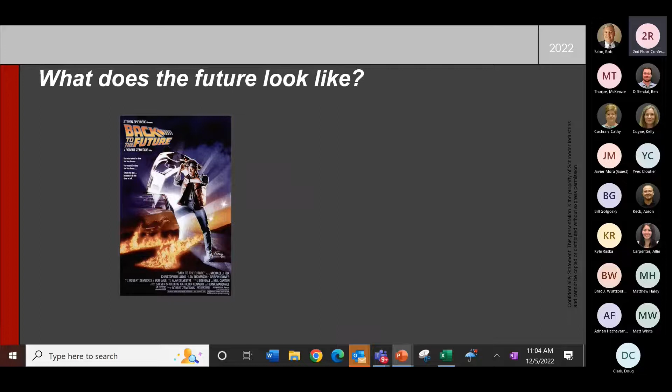Thank you, Rob. Yeah, to talk about the future, I always like to go back to the movie Back to the Future. I think all of us can really enjoy and relate. But that gave us a bit of a cinematic glimpse of what we thought the future was going to look like in the 80s and 90s. Now, at the time, that was a DeLorean strapped with a flux capacitor and ready to leap at a speed into the future, into the past, depending upon which version of Back to the Future you watched.

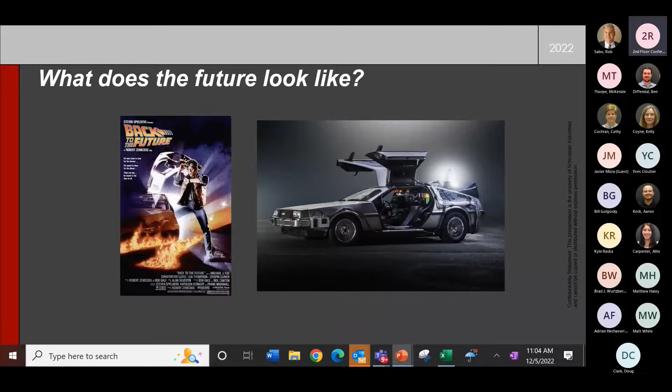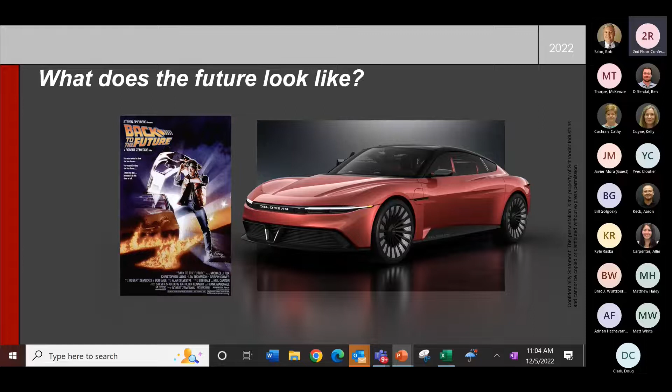But we even see that echoed today. In a similar characteristic, we see where DeLorean is looking to the future of their product line and looking at EV technologies and that movement within not only the on-highway industry, but what affects us today is that movement towards e-mobility and electrification. So there's a lot of questions left on our mind. And that one question is, diesel, where we're going, we don't need diesel.

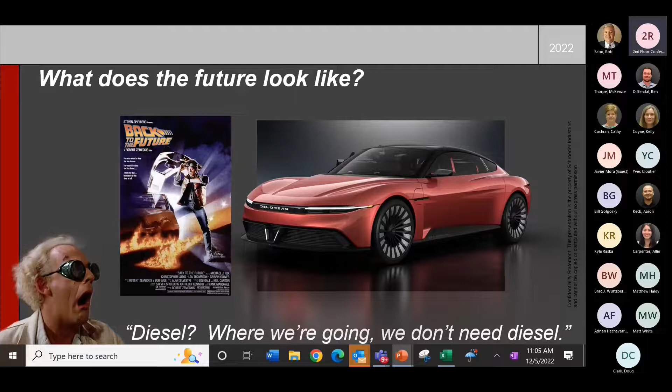That's a question that we hear quite often, one that we hear from corporations and consumers alike, but we're here to dispel that concern. I think it's easy to throw the baby away with the bathwater when we consider electrification and e-mobility. Now, 2 articles that we've had to reference highlight that diesel power is here to stay for at least a long run within all of our careers here on the call.

So electric vehicles within the military have been a critical part of what we look to as far as the indication of where fuel consumption is going. Much of the military vehicles are expected through 2035 at the minimum to continue using what we know as a common liquid fuel like diesel or jet fuel. Now, energy density of batteries is said to be a challenge, 2 orders of magnitude less than the jet fuel JP8 they're currently using. And because of the nature of electric power availability in the battlefield, recharging all electric vehicles just doesn't make a lot of sense given the current technology and where we stand.

Now, if we look to the consumer market, we look to a company like Cummins, one of the major engine manufacturers, that was published in OEM Off-Highway at the end of last year, that highlighted the fact that diesel still has a long runway. I love that phrase because it really highlights that this is an ever-changing and evolving ramp towards e-mobility. And off-highway equipment, married with that remote, desolate operation of many of the machines we're using, make diesel a great solution and very difficult to replace with the battery and energy storage technologies we have today and even on the horizon in the near future.

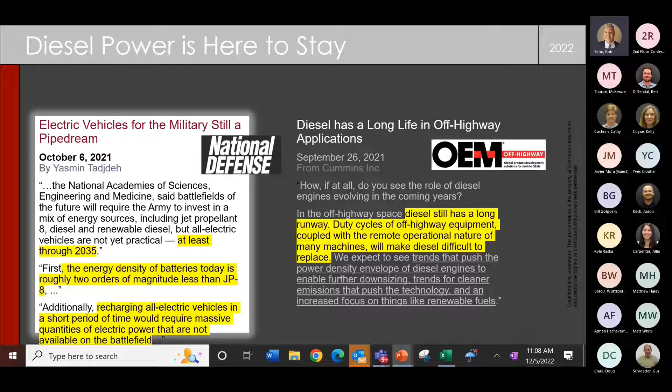The current global grids that are out there are not capable of handling the amount of energy that's in today's grid and the needs for that. We hear about the blackouts here in North America, the rationing over in Europe. You get into South America where they don't even have that type of grid. The CEO of Toyota said the same thing. They're going to pursue the role, but by no means whatsoever is that going to be a primary or dominant area for where we serve.

And where we serve, we are really focused on the diesel engine market. I'm going to segue into that for a couple different reasons, but that is the real forte of not only where we've been, but where it's going. Many of those applications are utilized in agriculture, off-road, the marine. We're not in the on-highway side of the equation. So as Aaron had pointed out with the military side, how do you charge those vehicles in remote locations? How do you do it multiple times? It's one thing to have a vehicle that's capable of that, but the operation, that type of placement, is the part that we're dealing with.

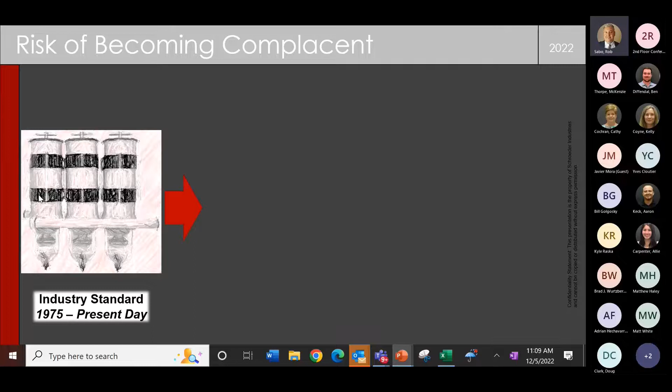So when we talk about the diesel engines in the market today, I actually got a little ahead of myself. Many of you have seen this in the field. It is a rendition of the Parker Racor turbine series. It was first introduced in 1975, and it is still being used today in the same present form. Some modifications, but basically you'll see that configuration either in a single filter, a double filter, and or a triple. That really hasn't changed over the years.

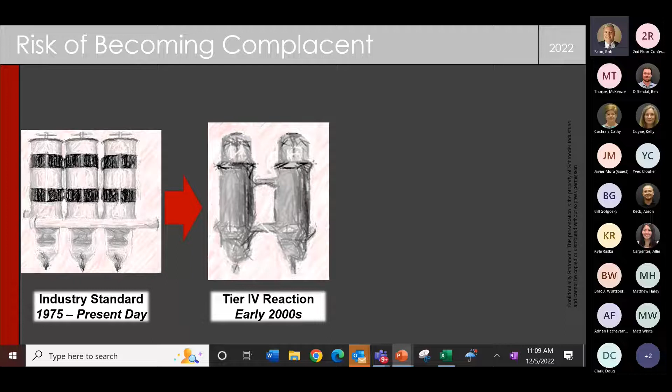With the advent of Tier 4, Cummins, who you'll see in this, had gone really with the same thing. They took a standard product off of their shelf and said, how do we manipulate that to work in the current market? How do we use this to go to the higher flow machines? And this is the current solution that you have. Now, even looking at the Tier 4 solution, that's a 22, 23-year-old problem. So what does the future look like?

We need to hear the voice of the customer. Us being a newer fuel group, one of the things we really want to focus on, and my group gets tired of hearing this, is to have a better mousetrap than what the industry has today. So looking at what the industry has today, we really went back to the drawing board, back to the basics, and said, how do we hear the voice of the customer and what is going to get us to that level?

Now, I'm going to share this with you before we share the design and the outcome of this exercise. In 2021, the NFPA developed a technology roadmap with the input of all the major manufacturers within the organization. In order of prioritization, there were really 8 significant factors that were a common theme across the board with all the major OEMs. Starting from the top and going down, these are all very important trends, and they directly shape how we are approaching the market, not only with our products and services, but the innovation.

Increased availability and uptime, increased productivity and performance, compliance with safety regulations, lower capital and operating costs, easier and more predictable maintenance, greater integration of technologies including data acquisition, utilization, and ownership, autonomous operation, and weight reductions with increased power density.

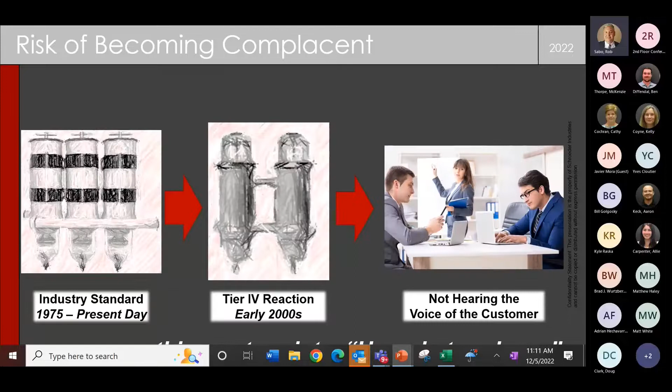How many of you are working with OEMs right now? Space is a considerable not only hindrance, but problem on all the current machines with all the newer things that they need to add to these machines. So when we look at what the past had offered, this type of product here, we really said, how do we help the customer by integrating all 8 of these things? And what you're going to see here is a direct result of that.

September of 2021, we attended ConExpo. This was the hard launch of our GHCF, that is the GH coalescing filter, and our GHPF. GHPF is the particulate filter. But what you see here in comparison to the other slide that had the turbine series, the Fleetguard series, or Cummins solution on here, what we've done is we introduced a single filter solution that can replace both of those applications in the field.

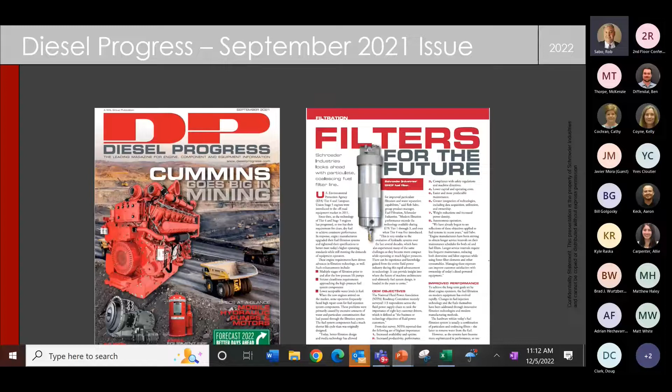Not only with a smaller footprint, a lighter weight, but also in the end with a much better performance package all the way around. So one of the things they were very, very impressed with, Diesel Progress saw that. They were looking for the innovations in the new technology. They offered to write this article, and they did, and it was all based on the product that we are releasing and sharing with you today in a multitude of different levels.

So when we go back and talk about what we're doing to adapt the technology to meet today's needs, I talked to you about the article, talked to you about the 8 drivers. The key areas that we're looking at is increased availability and uptime. How do we do that? I mentioned earlier in the presentation that Schroeder had developed some very unique technology for the separation of water through the coalescing technology that was developed during the advent of the Tier 4. There's a lot of different reasons that we're just not going to go into today as to what drove those innovations, but it was problems within the system.

Increased productivity and performance. Again, we've addressed that through media innovations. As you guys know, on the H&L side to the equation, we have higher efficiencies, we have higher dirt holding capacities, and we also have high and stable contamination removal overall within the system.

Compliance with safety regulations, doing third-party testing, not only with our core products, but also some of the SBF elements that we're going to talk later about. So you have the assurance of not only what we validated in the lab, but it can be validated in the field and going forward with a confidence level of being validated by a third party.

Engineered solutions, lower capital and operating cost. Well, when you just look at the picture of having 3 filters versus 1 filter in that smaller package, I can tell you that I can offer that at a much better price point, i.e. a lower cost and a higher service life. Many people that are looking at that system today are saying, well, why didn't we know about this earlier? We want to know more. We want to get a prototype. We want to get a sample. We really need to be able to work with you on a new solution that we have.

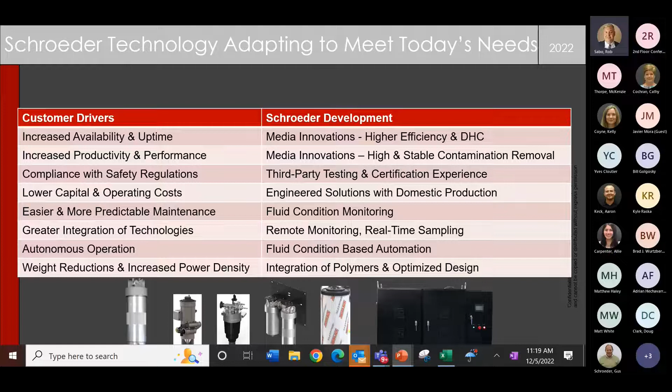Thank you, Rob. As Rob mentioned before, part of what we're doing is adapting to technology. One of the other things we're doing is adapting to the market changes, including the increased global interest in alternative fuels like compressed natural gas or hydrogen. Compressed natural gas is currently seeing a lot of growth in heavy-duty transportation vehicles and expanding into power production as well, mostly due to environmental concerns.

It's low cost and eco-friendly, so it's a nice alternative to the traditional engines and a good counterpart to our diesel product lines.

The CNG market itself is expecting to see a very large increase in growth over the years. Different projections put it out to different values, but any way you shake it down, it's growing, and there's quite a bit of opportunity to be seen there, especially as it's continuing to gain more acceptance on heavy-duty commercial vehicles.

One of the things we're seeing is that some of the current competitive marketers out there are having issues with their lead time. So we've seen an opportunity for us to break into that market by offering controlled lead times. We're building these to about a 6 week lead time after receipt of order, and keeping our pricing in line to be very competitive.

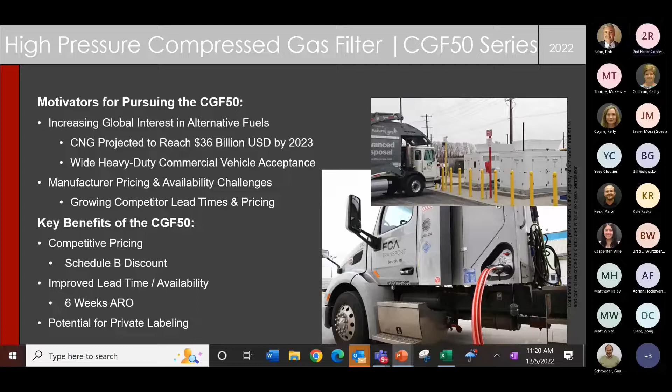We're also adding the potential with OEMs to create an opportunity for increased revenue with private labeling. So there's a lot of opportunity there to continue to grow.

The filters we're offering here are designed to work with both our Schroeder best fit elements as well as some of the existing competitive elements that are out there in the market.

These high pressure CNG housings are made with cast iron with a nickel plated bowl and epoxy paint, which are standard features for the industry. We've also added the benefit that the bowl is slotted to accept the retaining tabs that are on some of the existing elements out there.

It works with the standard tools existing for element service, and we have the option to include drain kits or gauge kits that are, again, very commonplace in the existing market. The added benefit to these is that they're assembled here in the USA, so we make them in our facilities and have a great deal of control over manufacturing lead time.

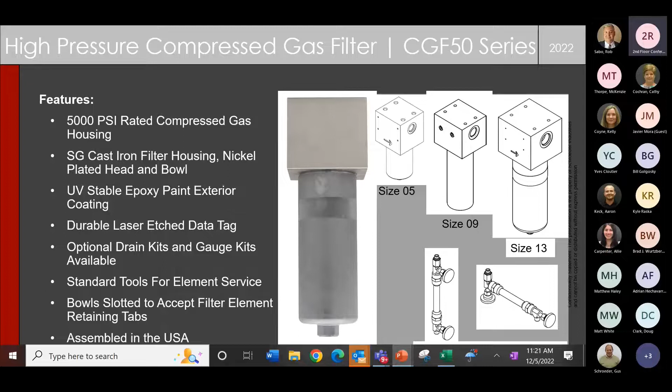The sizes we have available currently are both our 9 and 10 sizes, available upon release, and we do have options for our 5, 13, and 17 sizes. Just contact us and let us know what you're looking for.

The 9 and 10 are direct replacements for the B and C sizes, whereas the 5, 13, and 17 correlate to the Parker J Series A, D, and E sizes.

We are offering these in a variety of media grades from 0.01 micron, 0.5 micron, all the way up to the 100 micron stainless steel water separator.

For the porting options, each of these is available based on their sizing for either the NPT or coupling SAE size, appropriate for the overall housing. We're not tooled up yet for the D and E sizes; those are soon to be released. The other sizes are currently available.

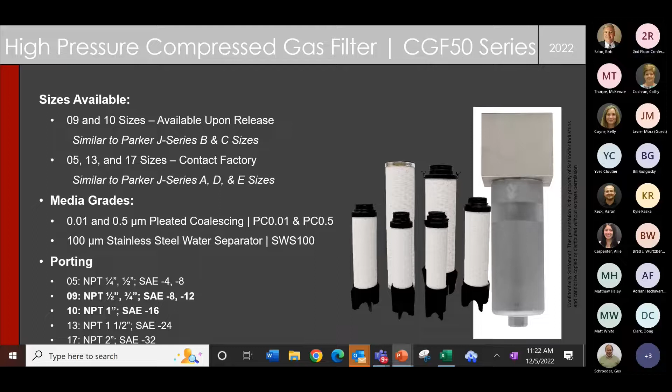As a continuation or expansion to that, we are also adding some medium pressure housings, whereas the others were the high pressure filters. We will be adding a medium pressure range, akin to the Parker H series. All of these are currently available to quote by project.

The housings for them are sandcast aluminum for the filter head and the cap, and all-aluminum housings with the industry standard epoxy painted exteriors and optional drain kits, just as we have for the other ones. Again, these are produced here in the US, where we have the ability to control those lead times, with best market availability for the raw components.

One thing to add here: we're focused on the compressed natural gas side of the equation based on our diesel engines segue, or focus, I should say. But for any of you, or those out there, that have refrigerated dryer manufacturers for compressors, for shop air, the compressor manufacturers out there, each one of those systems uses coalescing and particulate filters in conjunction, many times multitudes of those in series.

Very common to the Parker H series, the blue filters, or the Balston red filters, or the Domnick Hunter filters that you see out there. These products can also carry over to those compressed air streams as well, and would be a primary product for, again, compressor manufacturers and also the dryer manufacturers associated with it.

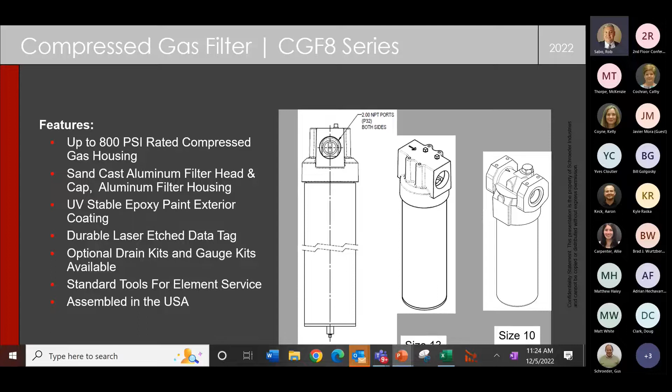So we're looking at expansion of other markets as well. And with that, I'm going to focus and go back to the diesel side of the equation and turn the floor over to Mr. Aaron Keck, the product manager of this group here. Thank you, Rob.

Along with our expansion into competitive replacements, we've seen a huge interest in the Parker FBO series in particular. Knowing the current strain on supply chain and how that impacts a lot of manufacturers in filtration, we've seen a great opportunity to produce a higher efficiency, higher performance filter that is essentially a form fit replacement. In applications where there's a need to improve fuel quality for higher tier 3, tier 4 interim, and tier 4 final engine fuel systems without the need to completely R&R the existing filtration, using something like the Parker FBO as a great solution.

We offer it in the standard media micron ratings using a full synthetic microglass media that we manufacture, which pairs up very well with our standard Z media elements. Also, we've developed and patented a 3-phase coalescing technology that we use in our standard catalog product line. We were able to adopt that technology and adapt it to fit within these housings.

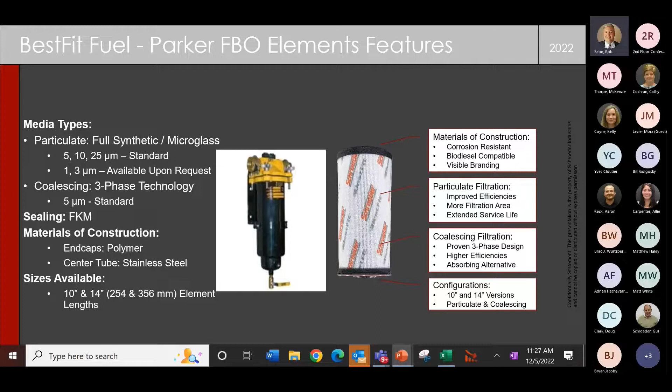Absolutely. Along with that, we can't forget about the benefit of private branding and labeling. For example, if the interest is to replace the Parker FBO 60357, which is a 10 micron, 14-inch element, we are able to improve not only the performance and capacity, but as you can see in these images and data, we're able to expand the surface area of the media by 68%. Using that full synthetic media on top of that additional area, we can increase the dirt holding capacity, or filter life, by over 400%, almost 450%, while maintaining a beta efficiency of near 10 micron.

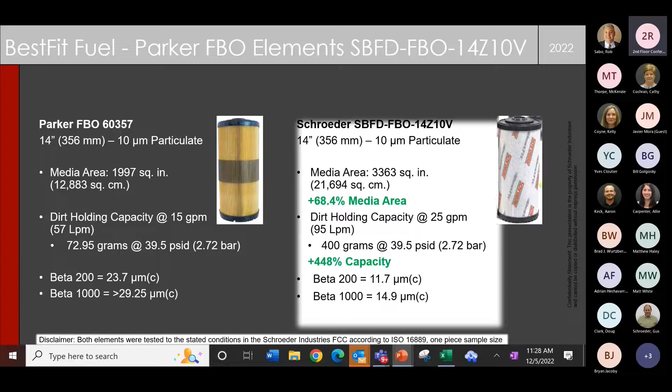On the next slide, you can see some of the performance characteristics of the fuel water separation of our coalescing media. The red bars show the filtration performance at a range of 10 to 25 gallons per minute, whereas with the existing incumbent Parker filtration media, in-house tests performed according to SAE J1488 show where the efficiency drops off quite rapidly. At lower flows, almost all fuel water separation efficiency performs measurably well.

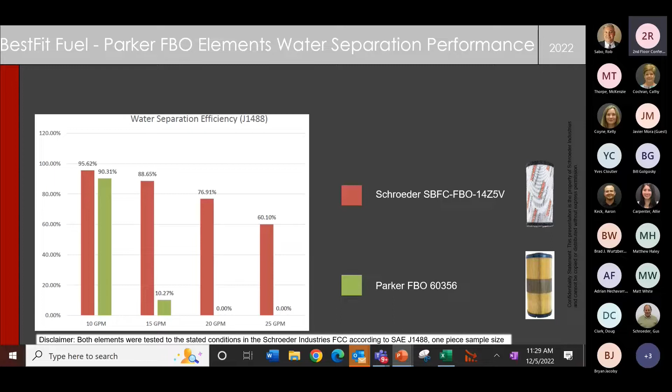But in this case, we can see where it falls below 92%, which in this test produces more than 200 parts per million water downstream, exceeding many industry standards for maximum water content downstream. We can see where that efficiency drops to zero at higher flow rates, meaning it's not effectively removing the water needed to protect the downstream engines.

We talked about bulk fuel filtration and our best fit offering and an expansion into CNG, but we also see a great interest and need in the market for fuel polishing. Within power generation specifically, we've had a lot of success replacing existing fuel polishing systems, displacing existing technology and adding additional technology like particle counting and automation, aligning with our movement towards the Internet of Things and Industry 4.0. We can provide a turnkey, intelligent, automated system with the same safety shutdowns and interlocks everyone expects, but with an improved filtration package and robust design built to last the life of the installation.

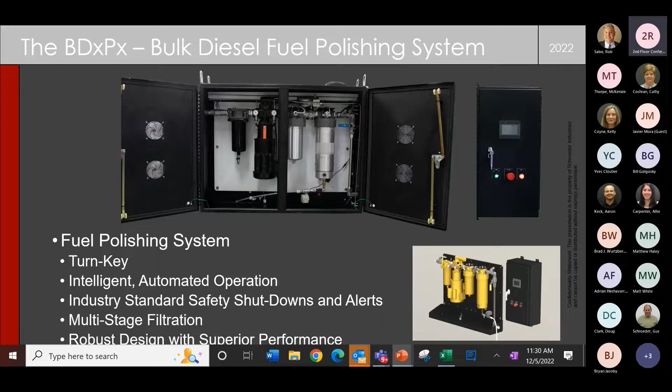With this product offering, we are offering both an enclosed and an open exposed frame version. In many generator enclosures, there's no need for a secondary redundant enclosure, so you can save cost and improve accessibility to the filter housings and other components for service, troubleshooting, and maintenance.

We have it sized so about 80% of the market requires a flow rate of 5 to 20 gallons per minute, and many of those can run off standard single phase service. But we can expand to meet even the most extreme application requirements—high volume fuel systems requiring 25 to 50 gallons per minute with our BDF2 filtration package, or a full bulk diesel skid-based system at 50 to 70 gallons per minute or higher if the application demands it. So it's a full product offering of enclosed and open drip pan versions with framework, pump motors, and that unique value-add automated control system.

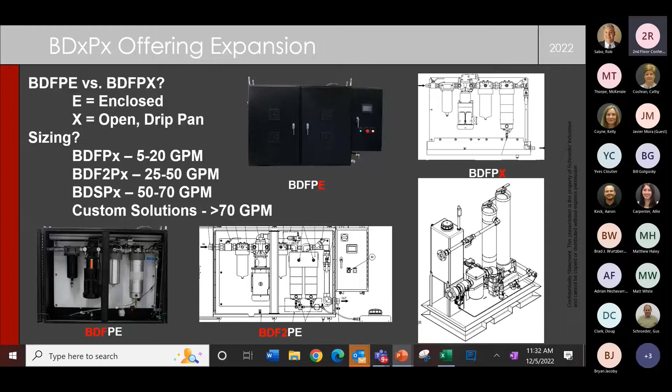As we continue to expand this product offering, we're also looking in areas, especially in power generation where critical uptime is key, at the need for duplex filtration. Our first efforts have been providing duplex solutions for both our particulate filters, the GHPFD for the duplex configuration, and our GHCFD for the coalescing duplex configuration.

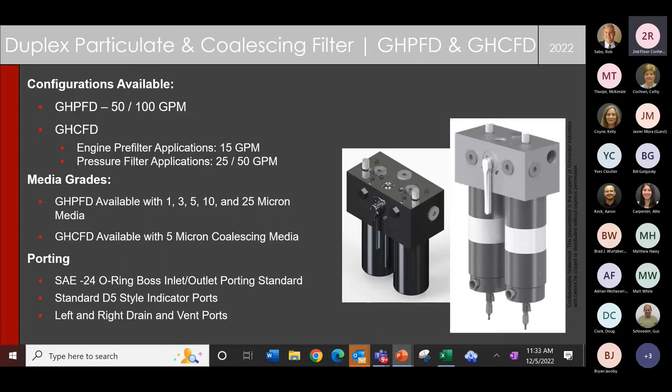These are built for both pressure and suction side installation, since many high flow engine fuel systems can be applied either way—as a suction first stage primary fuel filter or in transfer filtration with a transfer pump. The same media grades are available as our standard catalog product, and we're designing it to be somewhat modular, allowing porting configurations for top, left, right, and bottom inlet and outlet porting to fit each end user's installation requirements. Standard indicators and valving will be a key part of integrating this product, allowing for easy element service when the indicator shows it's time for a change.

So why are we chasing this market? Why are we focusing on it? Well, it's not going to be an obsolete technology—it's going to be around for our lifetime and into the future. But the market is looking for change. They're looking for new suppliers. They're looking for innovation and solutions that meet today's problems.

When you look at the current hydraulics and lubrication market that's out there, published information shows it's a $540 million market that we're all trying to take market share from. When we look at the fuel side of the equation, it's a much bigger market—almost 4 times that size—and that's just here in North America.

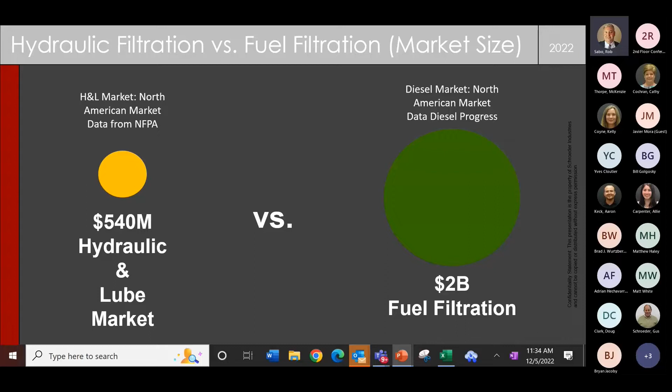These two markets, most of the time, go hand in hand. You're working on hydraulic systems provided through a hydraulic pump for PTO or vice versa, but they're run by diesel engines, and those diesel engines are in all these opportunities. So what we're asking you folks out there is, if you're trying to find new markets and new channels, don't reinvent the wheel.

Yes, there are opportunities to do that, but also reach upstream or downstream in some cases for the current customers that you have that are using these type of products. Bring us in to allow us to help you help your customer and in turn get this business. The nice part of many of these mobile applications is even in the smaller volumes, because once you're on there, the element annuity builds up. It is a revenue that's built over time. Many bulk applications as well, as we've discussed.

But primary reason, there's a lot of opportunities for market share, and we own such a small portion of this market share, but have some of the best technologies that are out there. There's only a couple places to grow. And folks, I will also tell you too, within the entire system, the fuels group is one of the fastest growing opportunities that we have.

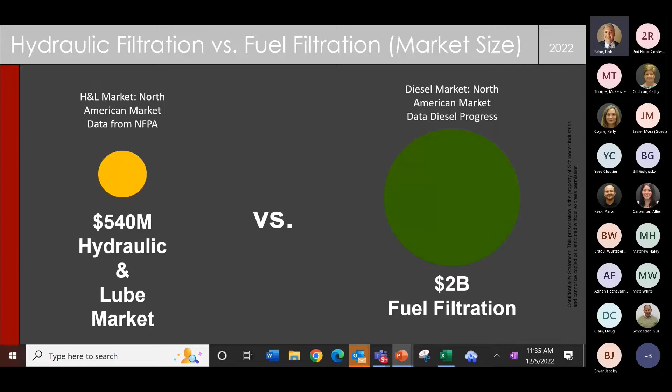When we share about some of the market segments and successes that we have, before I go in with a couple success stories, just the products that we reviewed with you today, the newer products that have only been out for the last year and a half, they have generated millions of dollars in new opportunities and revenue for us. We would like to be able to share that by growing that with you guys and allowing that to expand as well. Sorry, don't know why that did that.

But just a couple things on the mobile side of the equation for people that are dealing with mobile customers. This is a recent application that we have with a major agricultural supplier. It is CNH. It's gone into production, so I will share that with you. But what I really want to share with you are these application photos. And you'll see these many times on not only larger machines, but you can see them on smaller machines too.

And what you may see is you'll have an integrated fuel pump, which is, again, upstream of the filter. So if you're in a low quality fuel, you have a bad batch of fuel, you have microbial growth, your pump can be susceptible to be taken out by that. Then it goes through the fuel filter itself, sometimes in 1-2 stages for particulate and coalescing. But you also see all the piping that's involved in this. You see the space constraints that are taken up with these type of systems. It is very, very common in the industry.

And if you snap a picture, show us what you've got, and you could be able to go from this over to what you see on the right-hand side, which is our HDP 600. It has an integrated fuel pump, which is what you see down here on the bottom with that black out there. It is available in a 12 or 24 volt configuration, but there's three major advantages to this. One, it is again on the clean side of the filter. So whatever fuel goes through there, not only are the particulates removed, but it also allows the water to be drained off as well. So you'll get a much better robustness and reliability out of the pump.

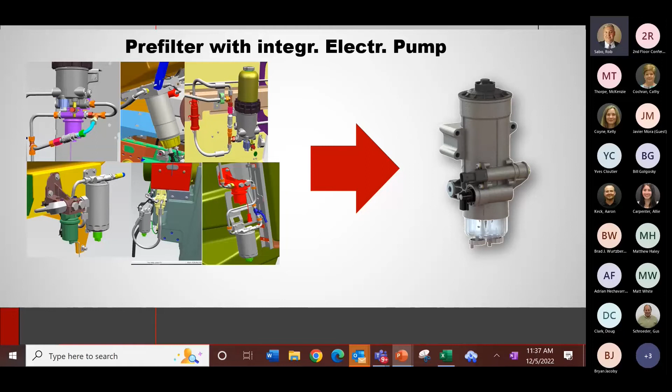The other major thing that this can bring to the table is in larger applications where there's a long run and rise from your fuel tank to the engine. Either one of those could occur, but many times they'll substitute those run and rise with a fuel pump. It sometimes could be multiple fuel pumps. Well, this system here has the ability of going all the way out to 10 meters high by 40 meters long in the worst application that we have right now.

This also allows a customer to, again, consolidate their system, make a smaller system that operates in the same functionality that it does today and meets those 8 different objectives of what we are looking for from the NFPA for what customers are looking for today. So with that, we've shared a lot of information with you in our application successes.